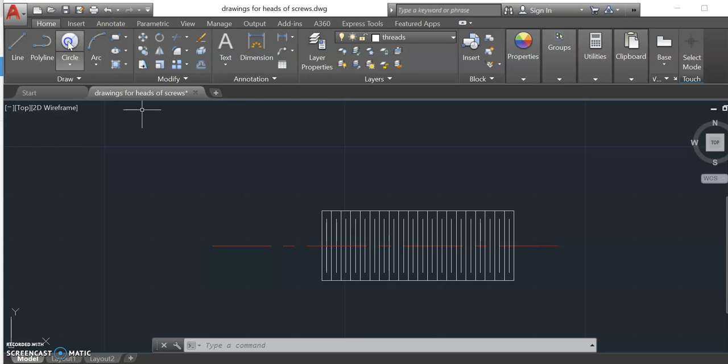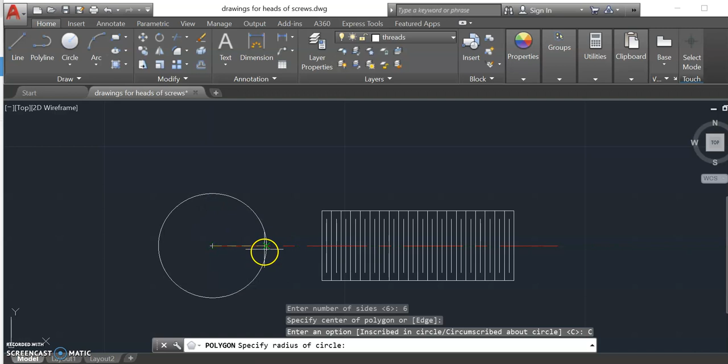If I go ahead and choose circle, I'm going to use the end of my center line to draw my circle. And for my radius, I'm going to type in 0.5625. Okay, now that I have my circle drawn, I can go to the polygon command. I'm going to type in 6, and I'm going to specify the center here. And I'm going to say that I want this circumscribed about the circle. I need to make sure that my flats are shown in this way. That way, when I project them down, they go down to the side view. So I'll click here since my circle's already there.

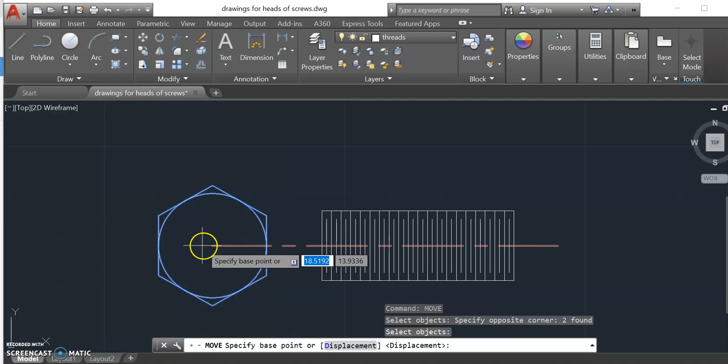Now this is a little close to that view, so I'm going to go ahead and move it over. That way it's out of the way and I've got a little bit more space to draw. Just going to move it straight over on the same center line. Now what I can do is I can go ahead and start drawing my lines for the view that I care about, the side view of the thread.

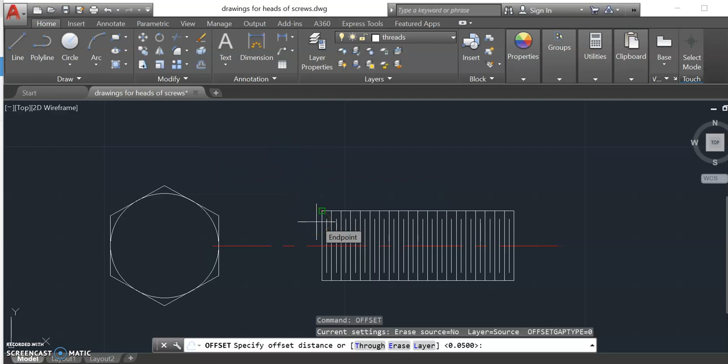Now if I go back and I look at the picture, the thickness of this thread, or the thickness of the head, is 2/3 D. If I type that in my calculator, 2/3 times 0.75, I get 0.495. So I'm going to go ahead and offset this line 0.495, and go from here to there.

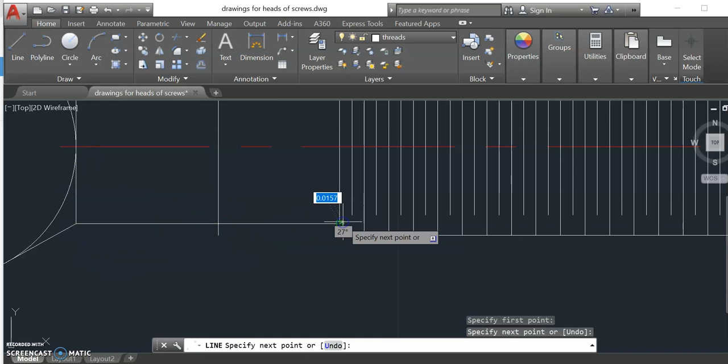All right. I'm going to go ahead and draw some lines that go straight down from these corners. I'm going to project this corner, this corner, this corner, and this corner, and that's going to give me the edges I need for my hex head. So I'm going to draw this straight over. I'm going to do the same thing here. I'm going to draw this till it hits this line here. I'm going to draw another line here to that line. And I will go ahead and draw one more line down here.

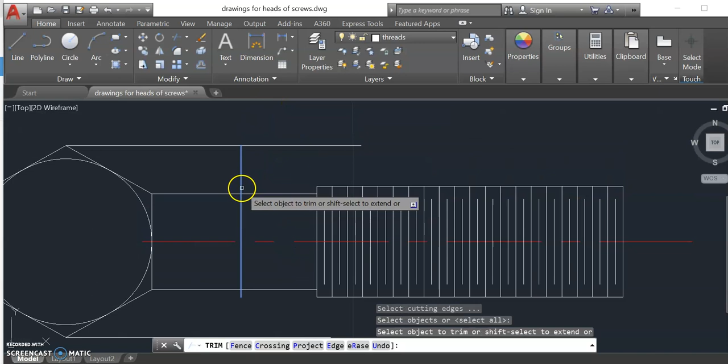Now I'm going to use my trimming tool to make sure I have all the lines that I need in the appropriate areas. So if I go to trim, I'm going to use my shift button to give me my extend tool, to make sure I have all the lines long enough. There we go, and now I can go back and trim the pieces that I don't need.

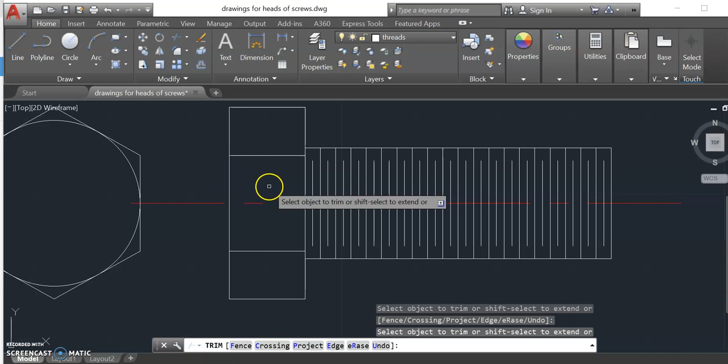Here we go. Now if you go back and you look at the picture, you'll see that I've got this curvature here that I need to draw, and it's dimensioned with a radius of R. Now we know that the radius is basically half of the major diameter, and that's going to be 0.375. So I'll have to offset this line down, but I don't know how far I need to offset it.

If I go back to this picture, you can see there's this little triangle that starts at the corner and it goes down at a 60-degree angle. This angle here is 30 degrees. These two lines are going to determine where that center point is for the radius. So I need to start at this corner and go down until it intersects this center line, and that will give me the point for my radius for my circle.

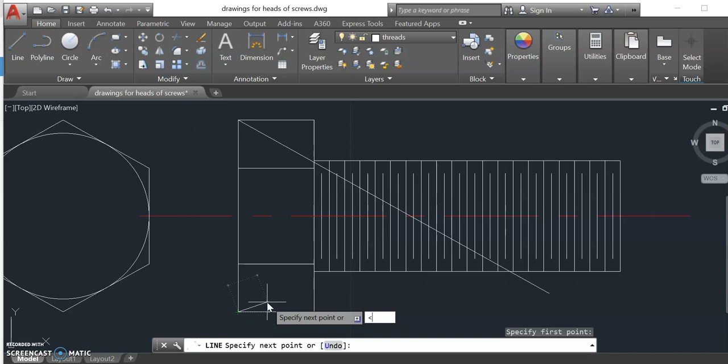So I'm going to go to line. I'm going to choose this point. I'm going to use my angle tool, so I'm going to select the less than button. I'm going to type in 330 degrees since that's -30. And I'm going to go all the way down so it extends beyond the center line of my screw. I've got to do the same thing again for the other corner here using my angle tool. This time it's going to be positive 30 degrees, and I'll extend that there.

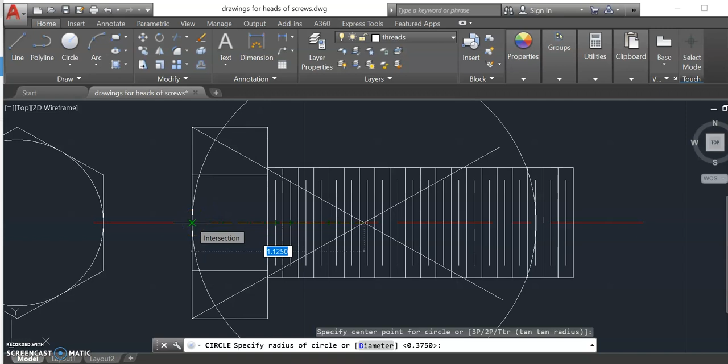Now I have the center point that I need to use to draw my circle. So I'm going to choose the circle tool. For the center, I'm going to choose the intersection of those two lines on the center, and then I'm going to click on this endpoint here. And that is what I need to draw that curve. Now I can go back. I no longer need these angled lines here, so I can go ahead and erase them.

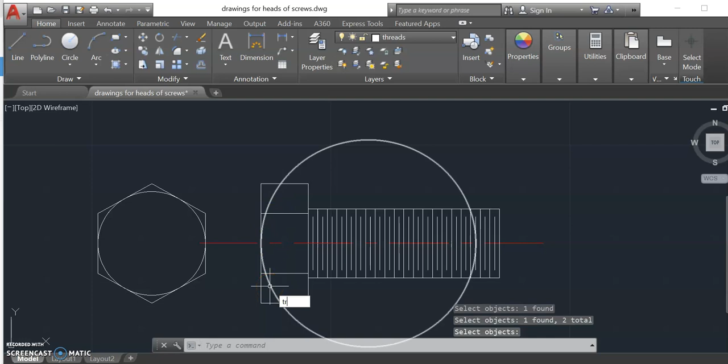They're finished. And I can go ahead and trim these lines, this large circle here and here outside of these two lines. I'm going to go to the trim tool, select all, choose this, and I can erase the rest of the circle here, and I've got that center circle drawn.

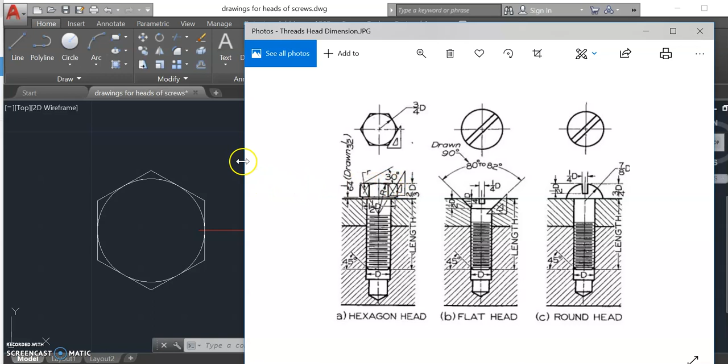Now the next thing I need to do is draw that little curvature right here. If I go back to the figure, you'll see that I've got this curvature as well. The issue is I'm not exactly sure where to draw that. I know that it's going to start here and it's going to end at the same point up here. So I'm going to draw a line from here to the outside of that edge, and that's going to give me my second intersection point. My third point for the circle is going to be about halfway between these two lines.

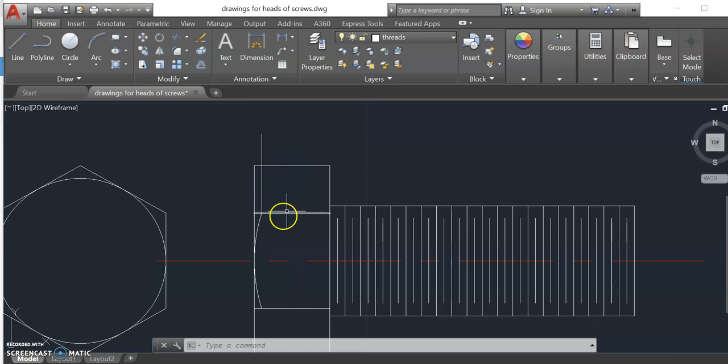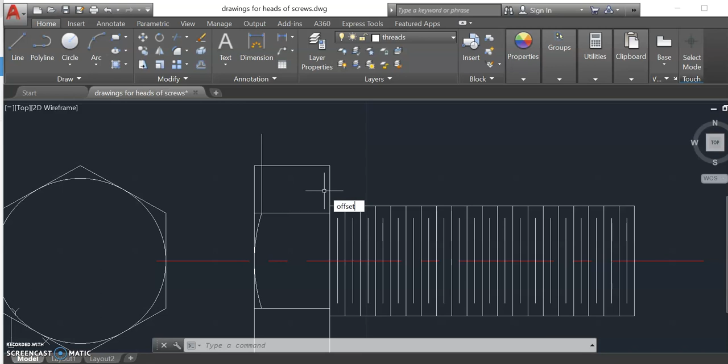If I measure the distance here, and you're going to have to do this for each size screw that you have, depending upon the major diameter, but for my particular size, it measures 0.3248. I'm going to divide that by 2, and I'm going to offset this line up. That way I have my third point. And if I take 0.3248, divide that by 2, I get 0.1624. So I'm going to offset that line. I'm going to type in 0.1624.

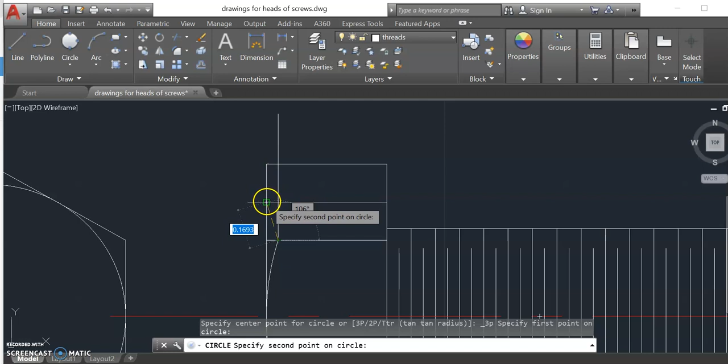And I'm going to offset this line there so it's halfway. Now I'll have this point, this point, and this point I can use to draw my circles. So if I go to the circle command and I hit the 3 point, specify the first point here, here, and then there, and then I have my circle. And that looks very nice. You can see that it's starting to take shape.

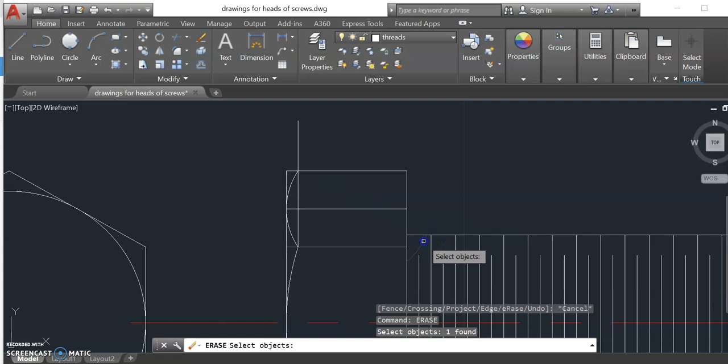I've got to do some trimming now, so I'm going to go ahead and do that. I go to trim. I'm going to select all. I'm going to trim this part of the circle, and this part of the circle. And then I can go back and erase some lines. I don't need this line anymore, and I don't need that line anymore. Also, while I'm here, I can trim this little section of that vertical line as well, and this here, and that there. Look how nice that looks.

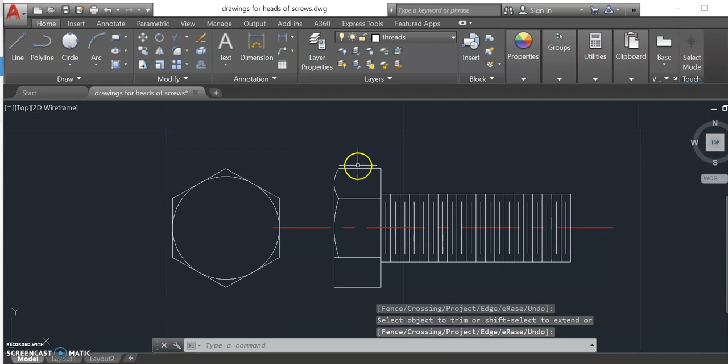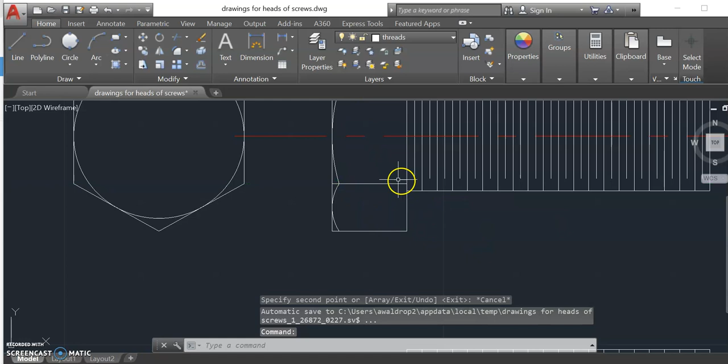Now I've got to duplicate this curve to the other side, so I'm going to do copy. I'm going to select this curve. My starting point is going to be here, and I'm going to just drag that down to this other section there, and there we go. Now I have to go back and trim those lines as well. So I'm going to go to trim, select all, trim this out, and trim that out. And it looks very nice.

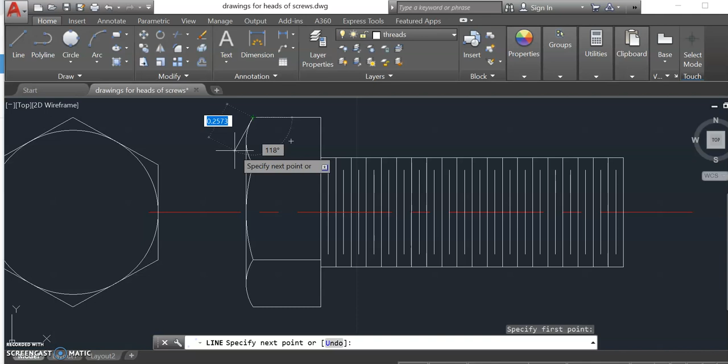I only have a couple more lines to draw, and then I'm finished my thread representation. There are going to be a couple of small angular lines here and here. If I go back and look at my photo, it's very hard to see, but there are some lines that go in at a 30-degree angle from either side. So I'm going to use my line tool and my angle tool. And I have to remember that 270 degrees is vertical. So I'm going to go 270 minus 30, which is going to be 240. And I'm going to draw that straight down.

Okay, now it's a little longer than I need, so I can go back and trim this. Select all. I'm going to use my extend tool to shift that out, and then I'm going to trim that off. And you can see I've got that nice angled line there. I'll erase this since I no longer need it. I need to do the same thing for the other side.

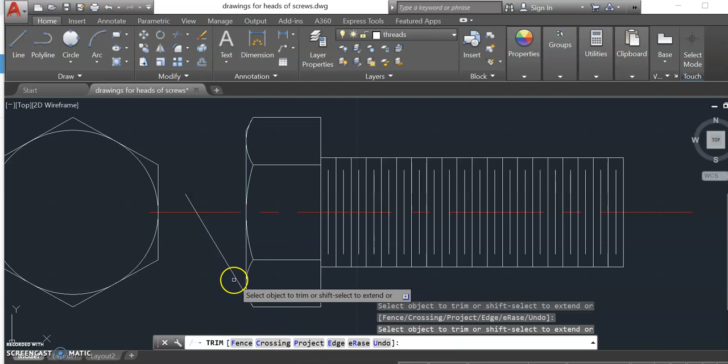So I'm going to go to line, use my angle tool, and we are going to go 270 plus 30, which is going to be 300. And I'm going to go straight out to here. Now I'm going to use my trim tool again, select all, extend this line out, and then trim this line away. And then I can erase this last little piece here.

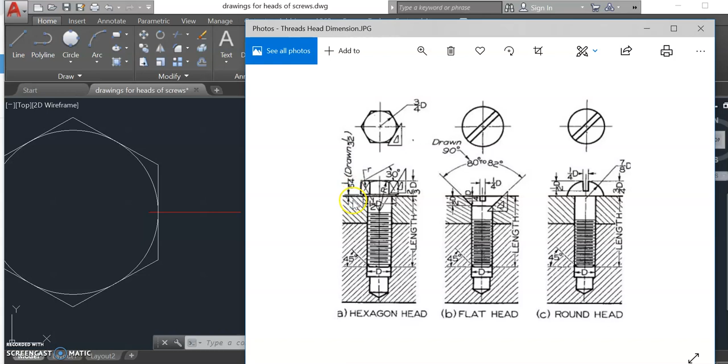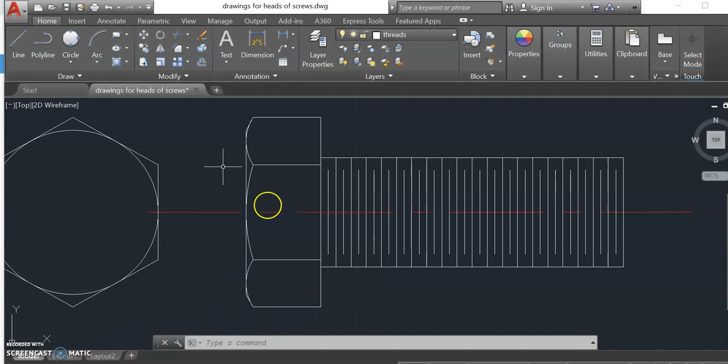The very last step in drawing our screw with the hex head. If we go back to the picture again, we'll see that I've got this tiny little flat here that's 1.5D wide and it's a 64th thick. Now even though it's a 64th thick, going back and looking at the figure again, you can see that it calls for drawing it to 1/32. So if I go to offset, and 1/32 is 0.03125.

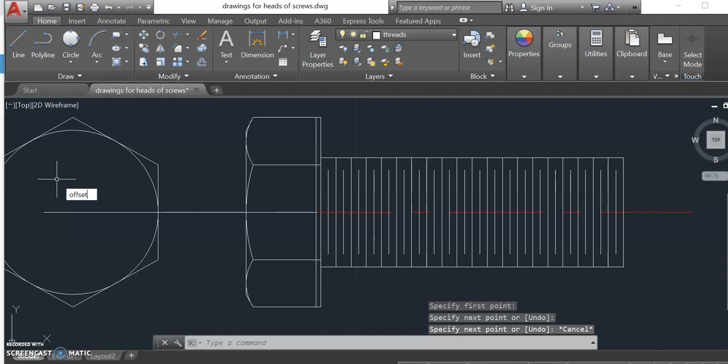And there's that line. Now I need to draw a center line and then offset that so I can draw those two little edges right there. So I'm going to draw a line from this intersection point out. And I'm going to go to offset, and I'm going to type in 0.5625 because that's half of the dimension that I need to offset it to. So I'll offset that here, offset that here.

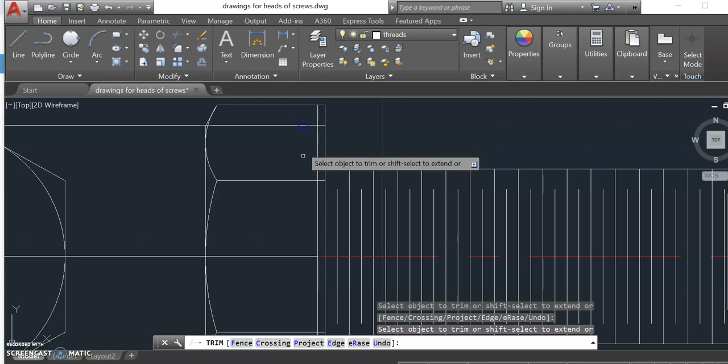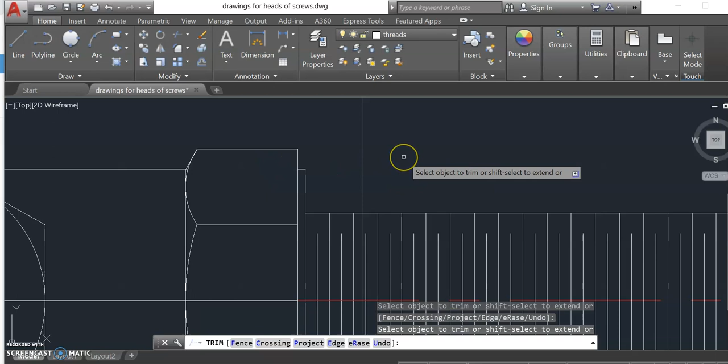I'm going to use my trim tool. I'm going to extend this out, extend that out, and then trim these little edges here. Clean that up so it looks very nice. And then erase these last lines that I no longer need. And we are finished. If you take a look, you can see how nice that looks.